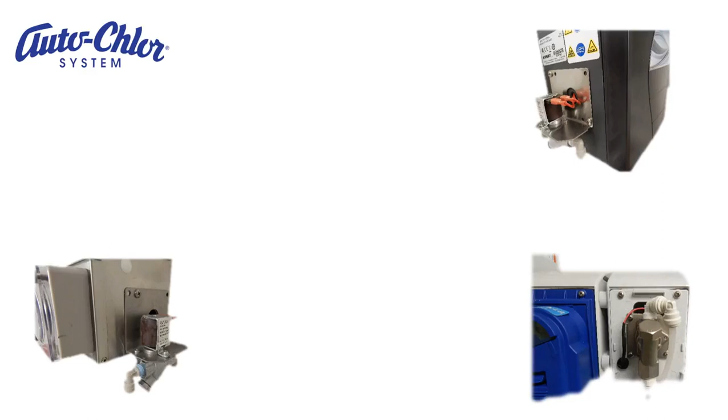In this tutorial, we're going to take a look at the flush solenoid valve that we use in the OPL laundry dispensers.

A solenoid valve is considered an electromechanical device because it combines electricity with mechanical operations. The solenoid valves we use are in a normally closed position. When current energizes the solenoid, it creates a magnetic field. This magnetic field pulls a plunger up toward the coil, allowing the opening of water to pass through it.

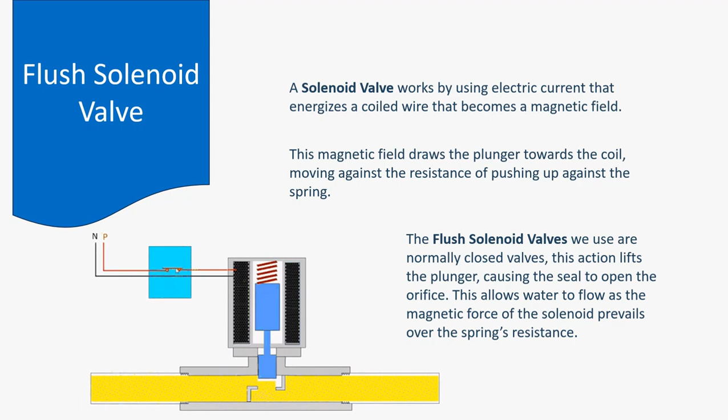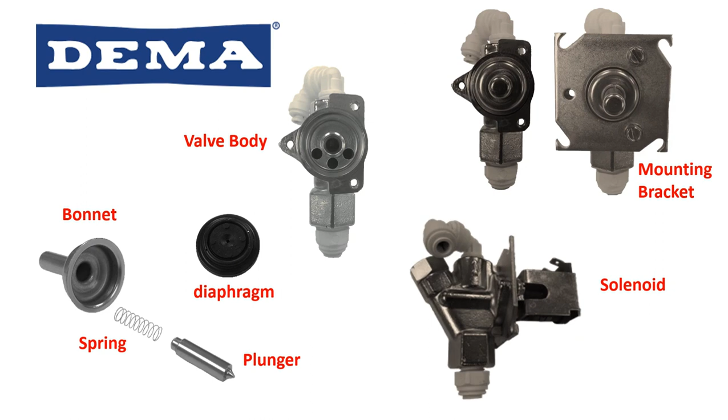This is what a solenoid valve looks like for Knight, and this is what the one DEMA uses. You'll notice that the bodies and the functions are basically the same. They use a different configuration in how they mount them and the mounting brackets. The component parts - the diaphragm, the bonnet, the spring, and the plunger - are identical and interchangeable between DEMA and Knight dispensers.

The valve bodies contain a wye strainer. Just like in warewashing, the wye strainer catches debris and dirt particles, and it can also create scale deposits. Periodically, the screen should be removed and cleaned.

When putting this back in, your best bet is to use some silicone around the threads. Brass will have a tendency to seize. If you put silicone around the threads when reinstalling, it makes it easier to remove next time you need to service it.

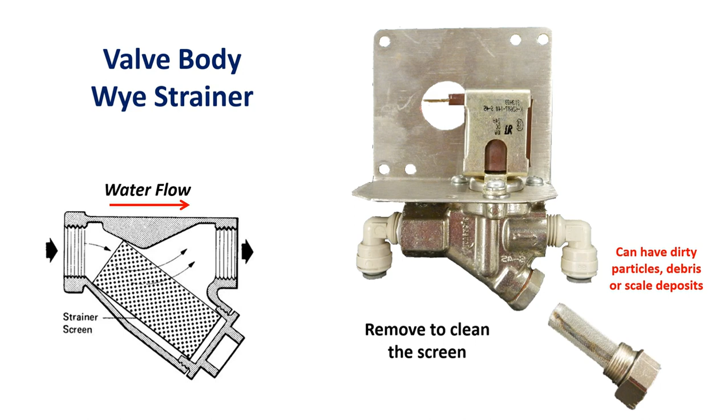Waterline connections: in all our more modern OPLs, the waterline connections are connected with quick connects. When applying the water lines, your tubing should be cut square and pushed all the way up into the quick connect. When pushing the water lines in, always slightly tug down on it to make sure that it has snapped into place.

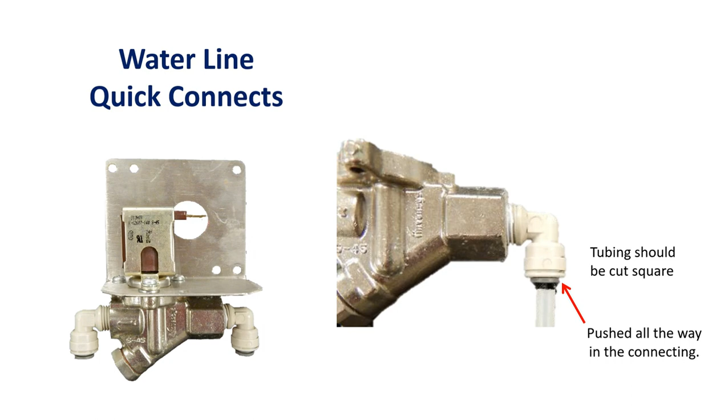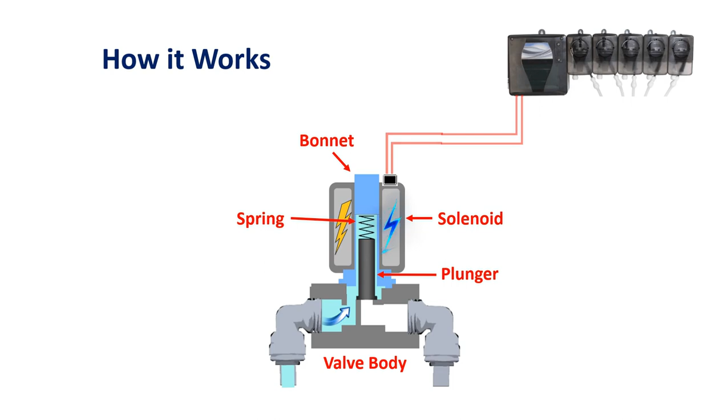So here's how a solenoid valve works. From the laundry dispenser, when the programming calls for it, it will energize the solenoid. When we energize the solenoid coils, it creates a magnetic field. This magnetic field will then pull the plunger up, allowing water to now flow through. When the electricity is removed, it releases the magnetic field, and the spring on top of the plunger will push the plunger down, shutting off the water flow.

The service points to a flush solenoid are the diaphragm, the plunger, the spring, and the bonnet. The biggest thing that goes wrong is the diaphragm. The diaphragm has a weep hole in it, and water stays on top of it at all times. The diaphragm can get weak, torn, or cracked, which will not allow it to work properly. The other things that happen are with the plunger and the spring. Because water is constantly up in the spring and on the plunger, it can corrode and prevent it from going up and down, opening and closing the diaphragm.

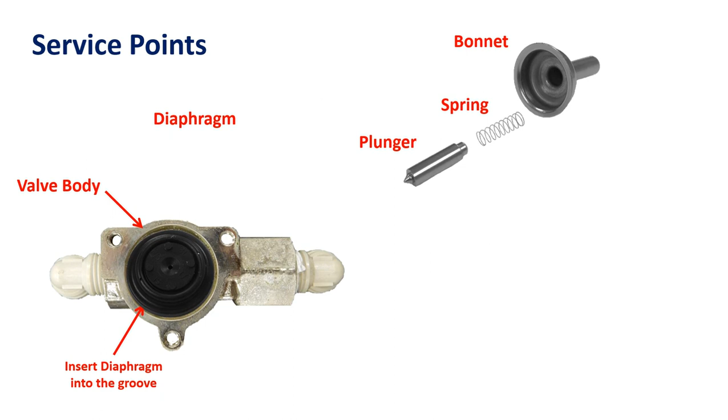When servicing this, insert the diaphragm and make sure that it fits into the groove properly. From here, the plunger, the spring, and the bonnet mount on top of it.

The other service component is the solenoid itself, and again, this is an electrical device. To test whether the solenoid is working correctly, remove it from the bonnet, put a screwdriver up in the middle of it, and activate the flush. The screwdriver should be pulled to the side of the solenoid when activated. If it does not, the solenoid is bad and should be replaced.